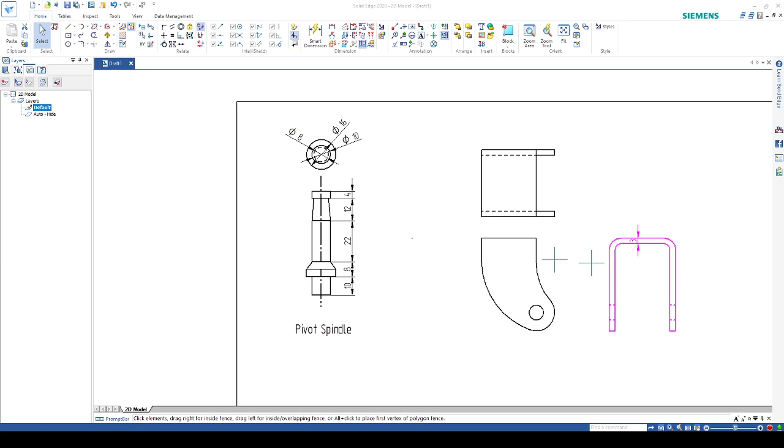Okay, just to draw the third component, which is the wheel. So I'm just trying to get the solid edge back up. Done.

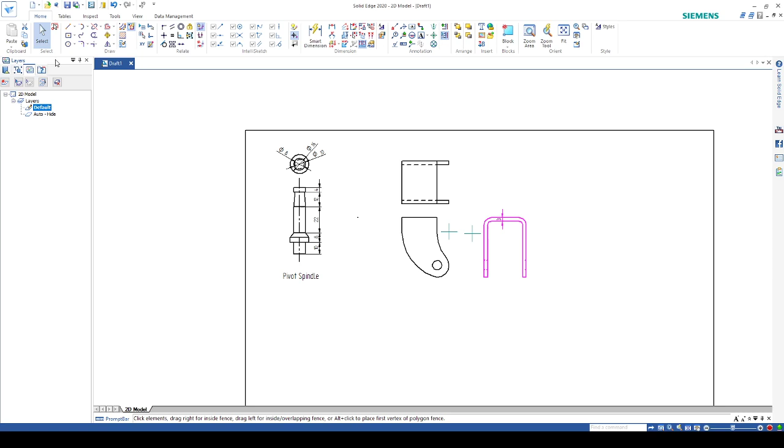It's got a spherical radius, which just makes life a little bit fun. It's 26 mil wide and it's got a diameter of 60, about the size of a tennis ball essentially. So let's just draw it in anywhere at the moment, later on I'll drag it in. So it's spherical, diameter 60, radius 30.

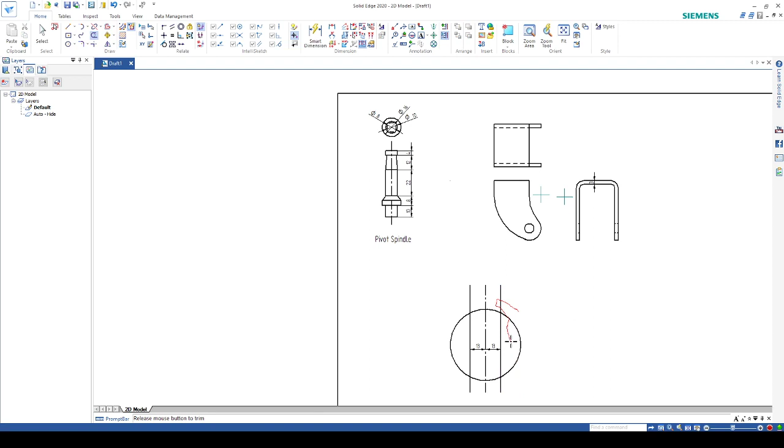Done. So this here is looking at it from the front. I know there's the centre line. Done. I know that I'm 13 mil off that side, and I'm 13 mil off that side. Done. So there is essentially the front view of the wheel. Oops, Control Z.

I've still got to go back and dimension the last one. I'll put this up as a series of 5 videos or thereabouts. Okay, so there is the centre line, there is the front view of the wheel.

Now let's draw it looking at it from the side. We know that that's there. I'm just pitching across the layout lines at the moment. I know that that's there, that's the inside corner of the wheel, that's the inside corner of the wheel, that's down there, and we need the centre mark.

Let me just draw in another line here. That's exactly 60, and there is the centre mark.

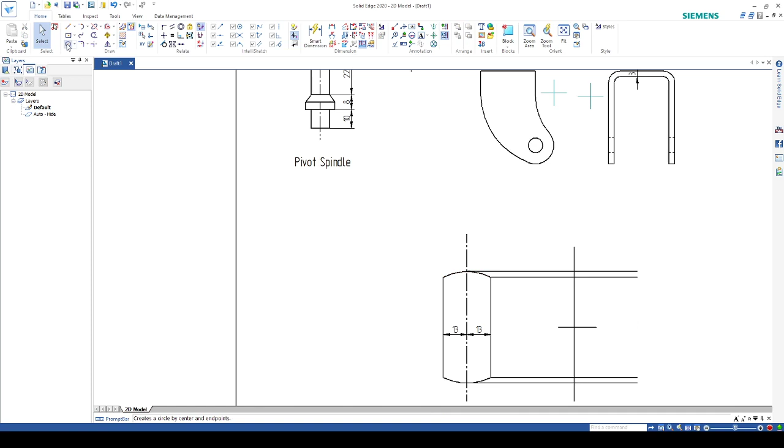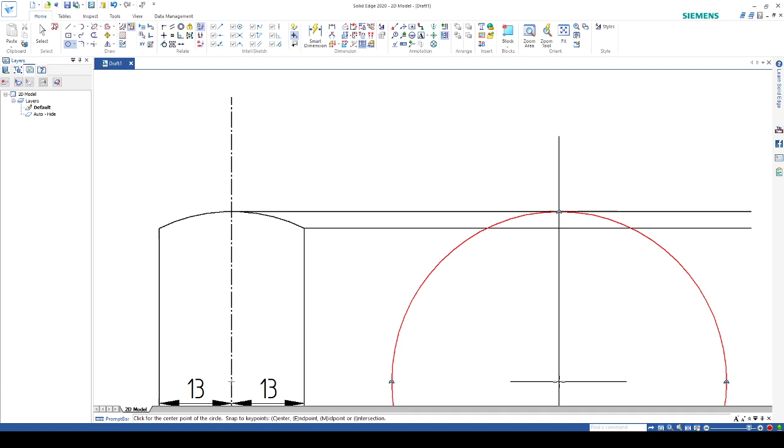Now, so I know I've got multiple circles now. That is really the outside radius of the wheel, that's at the tip where it's rolling on the ground. This one here is the edge of the wheel.

Now we'll offset, and it says the lip is 5 mil in. There it is, drawn 5 mil in.

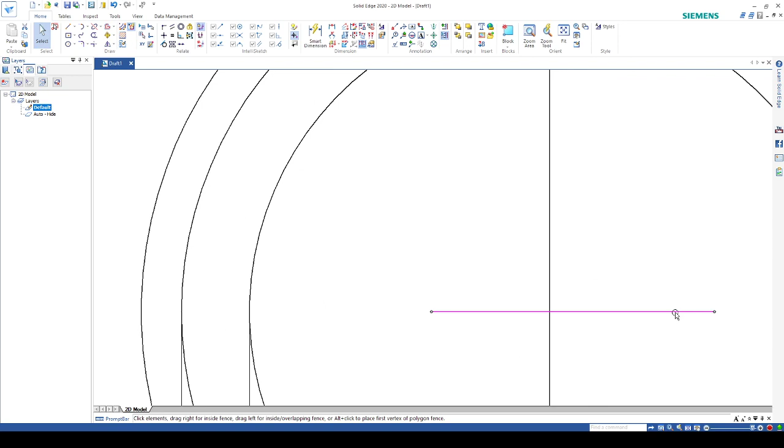That centre hole, let me just mark in a centre line. Centre hole is diameter 8.5.

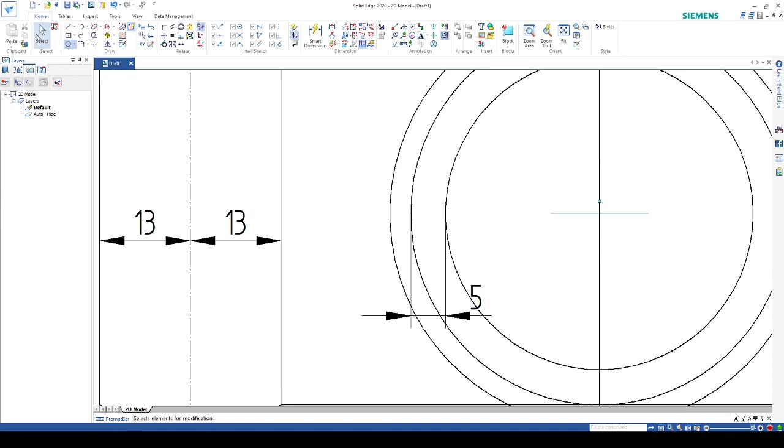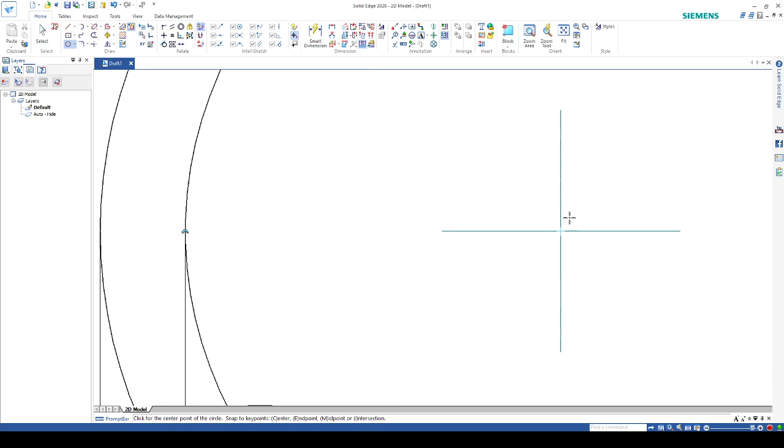It's just irritating me, I'll just delete that. Now I've got the centre line, or centre mark. Okay, that centre radius is 8.5 mil. I've definitely got circle centres ticked. There it goes. So it's 8.5 mil diameter.

And we also need another one, 18 mil diameter. Done. Radius, not diameter. Try again, 18 mil diameter. I think I drew that last one 18 mil radius. 18, bang, that looks better, bang.

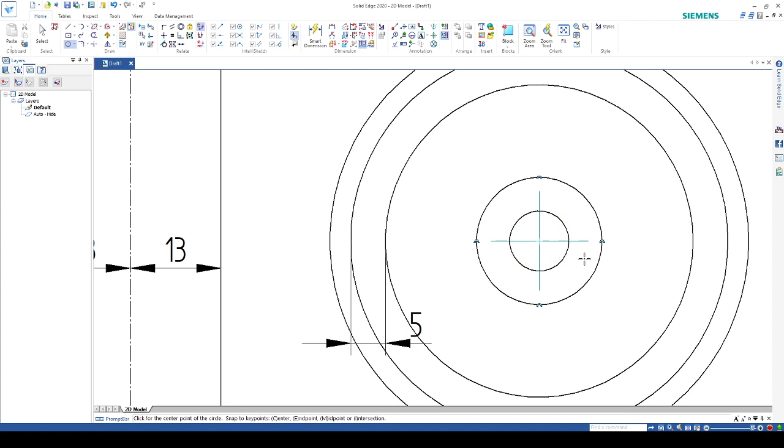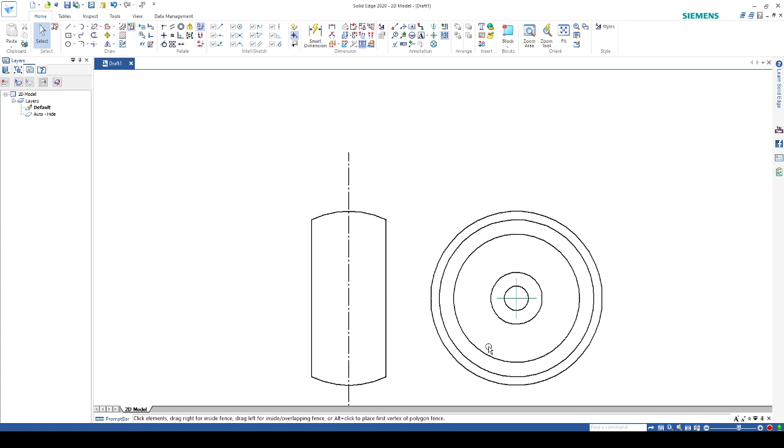So there's our front view of the wheel, or side view, front view, call it what you will. I've drawn at third angle, depends which way you're looking at it. So there's our wheel. Delete, delete, delete.

I don't really think we need to draw the spacing washers, nor do we need to draw that pin. I suppose just because the drawing asked us to, we can. We've got to go through and label that and dimension them. We've also got to label this. So actually we'll just draw in that pin.

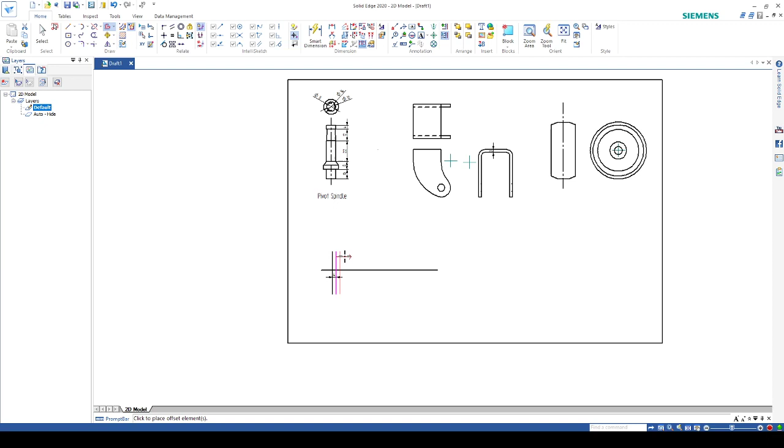Very difficult. Offset tool, 4mm and 42mm. 4mm, 42mm. Offset tool, 4mm both ways.

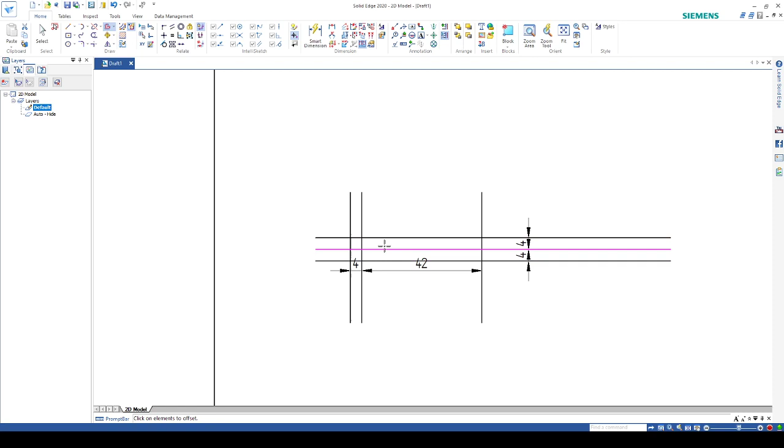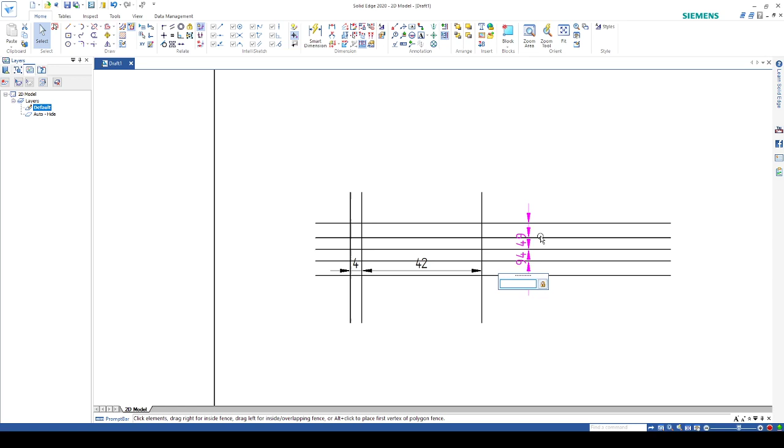And the radius of that is diameter 18, so that's 9 either side. Done. All those dimensions I'll just delete, and come back to it later, delete. So now we'll just take out the removal tool and just take out what we don't want.

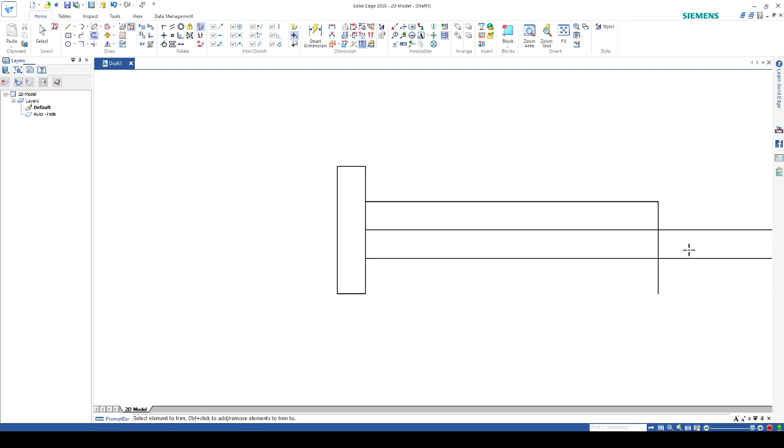Extend that to the next, extend that through to there, delete that, and delete that. Okay.

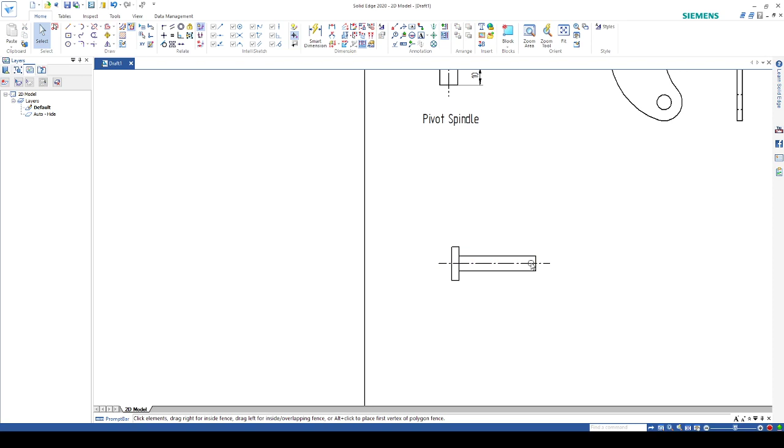And of course we've got 2 circles to draw. It's just been 4mm, it's been a little bit difficult to go. Let's see if it actually picks it up. There it is, diameter 18, done.

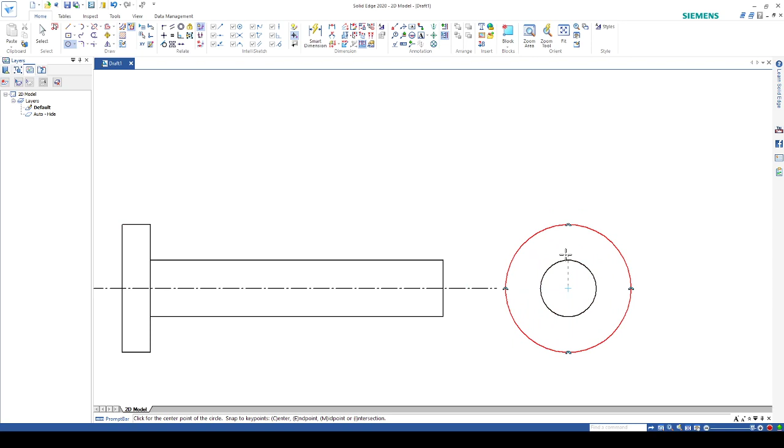So there's the pin, and a spacing washer is 1mm thick, diameter 8 internal, blah blah blah. So spacing washer.

I'll just put in diameter 8 and diameter 18. Did it again, 18. 1, 8, look at that, it did work. 18, as well as the diameter washers, a spacer 18 by 1mm thick.

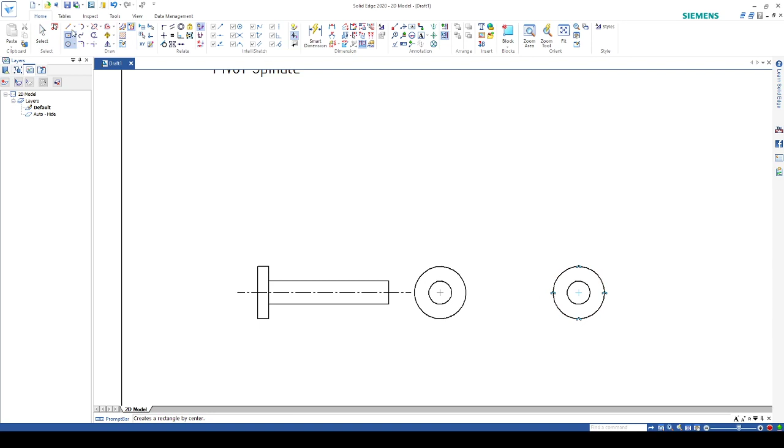So I'll just draw a simple rectangle that's aligned to the tangent. Done. We're just drawing a simple rectangle that's just 18 by 1mm by 18. Done. Delete that.

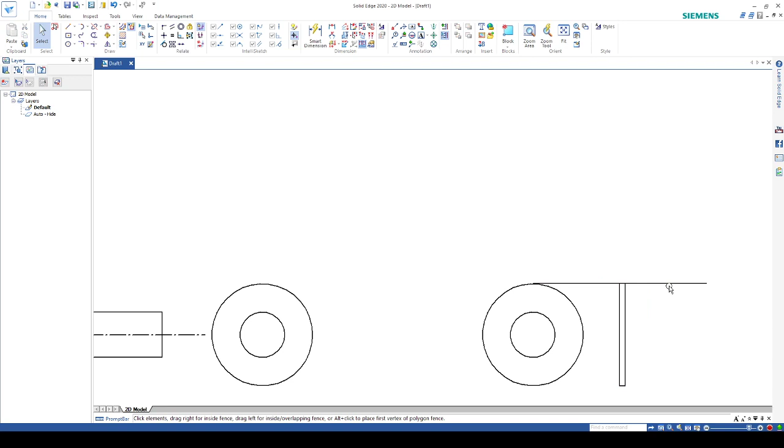In the real drawing, you just say spacing washer 1mm thick and give dimensions, even if you went that far. So these are your various component drawings. Let's just dimension these now.